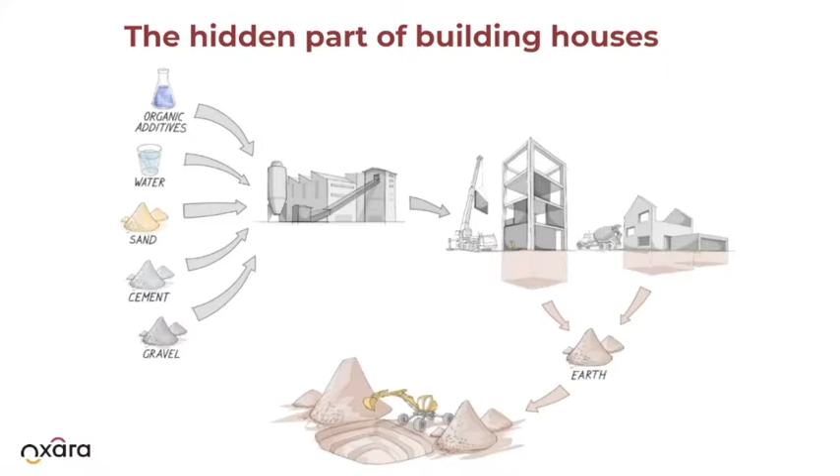What is not so well documented or evaluated is the amount of excavation material that is landfilled in the process. The excavation material is what you take out of the ground while doing the foundation or producing a tunnel, and so on. This amount of material represents, in Europe, around 45% of construction waste, around 400 million tons of excavation material.

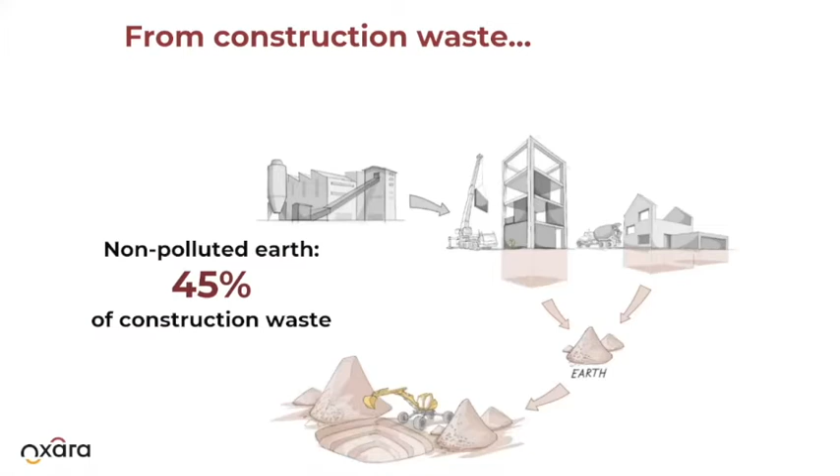No problem. So we're talking here about more than 400 million tons of excavation material landfilled each year, from what we got from documentation, and there are some countries that don't provide such information. So it's an important amount of locally available resources that is currently wasted. The idea of Oxara, which was carried out during my PhD, was how do you use this waste and transform it into a more sustainable building product?

We've developed a mineral admixture that allows processing of excavation material like conventional concrete, using similar concrete infrastructure and processes. That means you're able to mix it in a concrete mixer, it's fluid, and then you're able to cast it, remove the formwork within one or two days, and use it for low-rise construction — two or three-story houses — or for non-structural elements, as you can see here. This creates a closed-loop system.

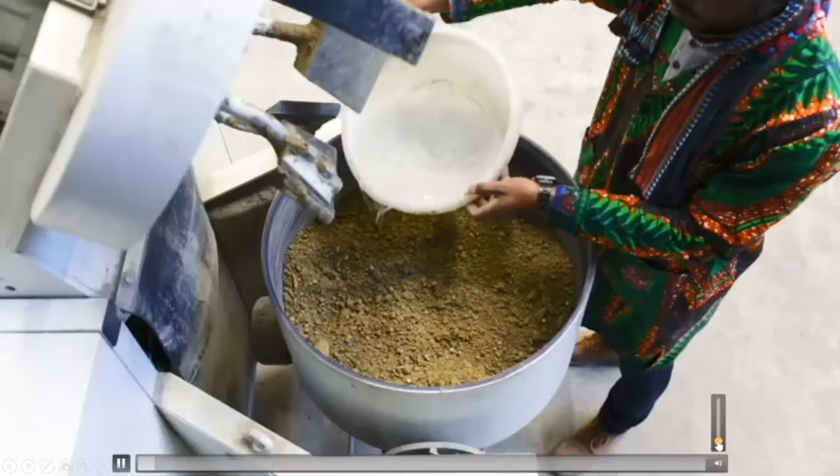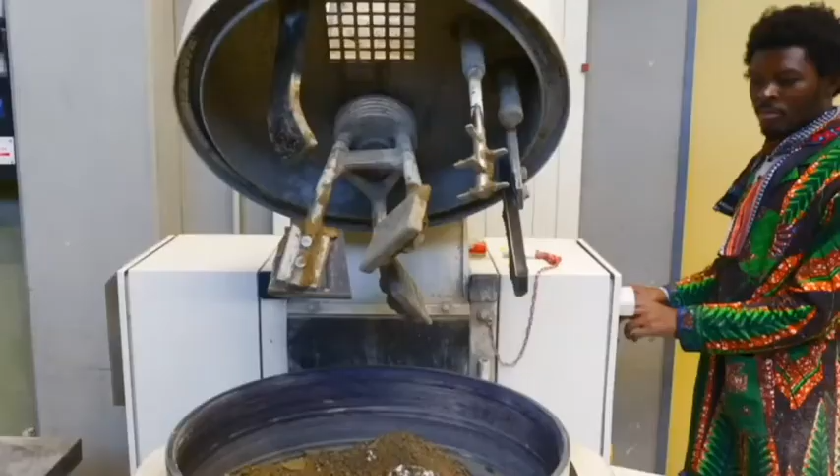So what does that mean concretely? Here's a small video of the process. You have the excavation material, you add water, and then our admixture, within a range of 1 to 2% maximum, and you mix it like conventional concrete. The material is fluid enough to be cast or vibrated.

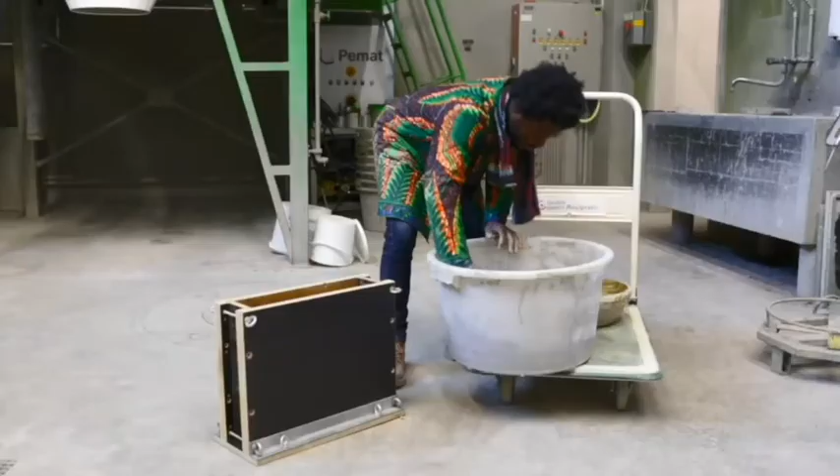The advantage is that because there's no cement — since we're trying to make a cement-free product — you can work with it without wearing gloves, because there's no aggressivity or alkalinity in the material. And in this case, 24 hours later, we're able to demold the formwork.

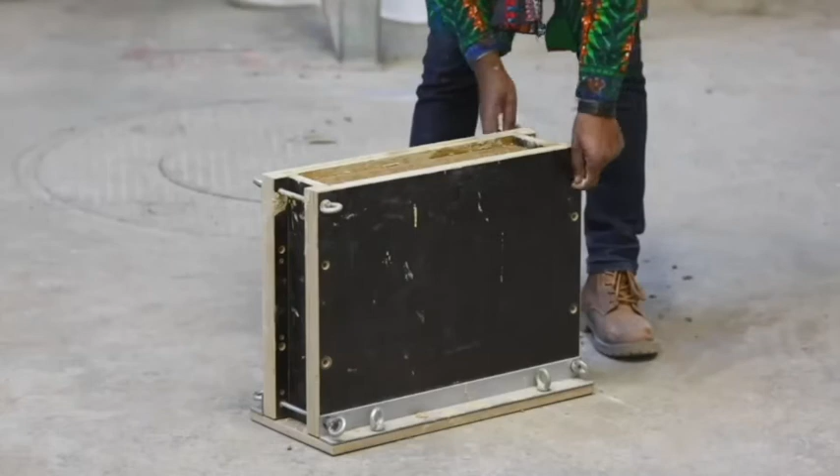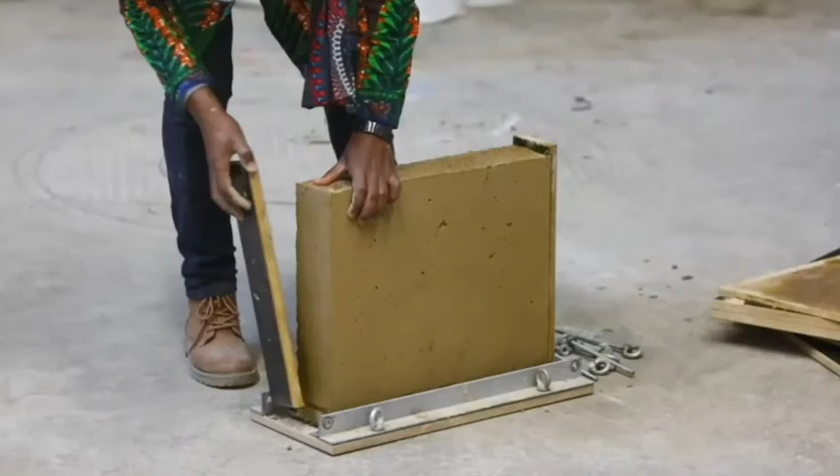So this process was done at the end of my PhD to validate whether or not our admixture technology, which I did my PhD on, worked, and if it worked with a different sort of excavation material that one could take in the area of Zurich.

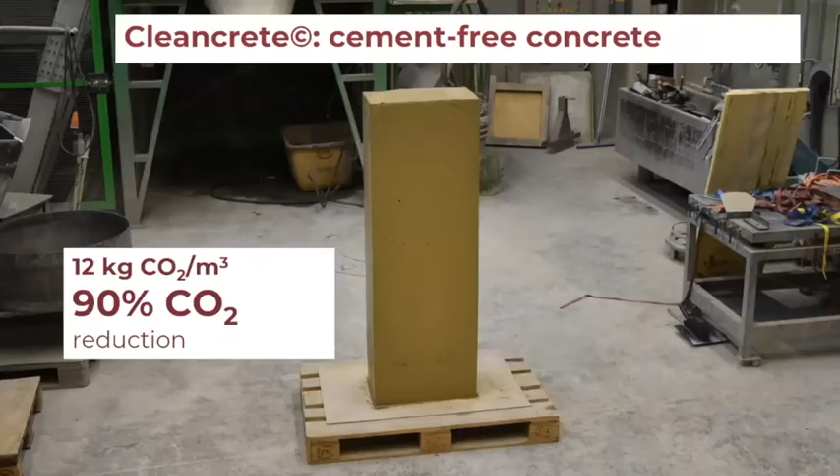So later on, the goal was to test on a little bit bigger scale how this product will work and to estimate the CO2 impact. And this was done in 2019, our first scale demonstration. So it was 1.5 meter height, 30 centimeter, and was cast and demolded after 1 day.

And we did some LCA analysis, and then we realized that the embodied CO2 is around 12 kilograms of CO2. While if you take normal concrete, we are talking here about around 300 kilograms of CO2 per cubic meter. Therefore, we estimate a CO2 reduction of 90%.

Keep in mind that our material is not, in terms of performance, comparable to concrete, as we are talking here about a material with a similar performance as a rammed earth product.

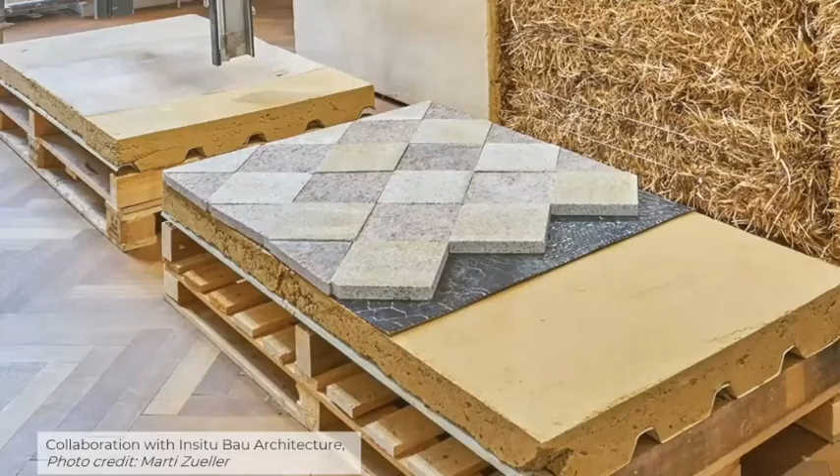And we went on to do also some different demonstrations. This one was done also toward the end of my PhD with Insitu Bau Architecture. And the goal was to use it as a screed and see how the material would perform, and if it could be used for such application or not. And now we are interested to further develop it and try to see how to implement it in the market.

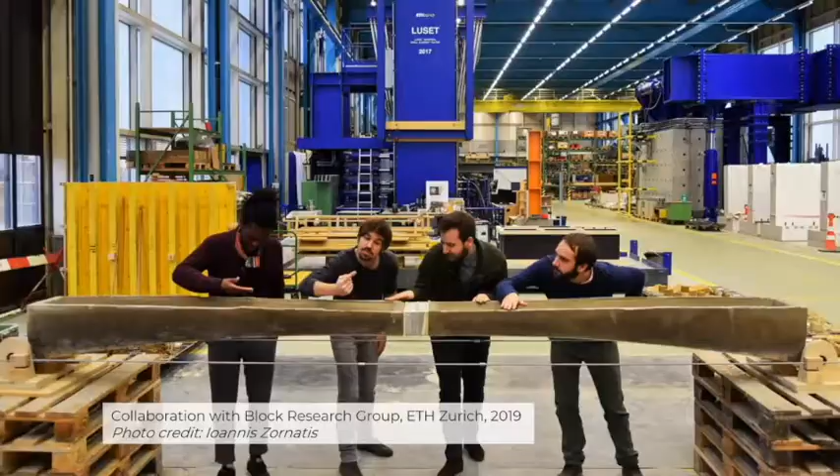Another project that we did also was with Philippe Block Research Group at ETH. And the goal here is to combine low performance concrete with a high-tech design, taking into account the material property, but focusing on the design of the arch, here kind of an arch structure for a floor application.

And on this floor slab, where a group of 2 persons can carry each part, we kind of post-tension it with this cable, and we are trying to evaluate how much load the floor can take. And we are able to put around 250 kilos on this unique part of the floor. And our goal is to produce more, to put them together to create a full floor system.

And it's currently being developed now with the PhD student and the postdoc. So hopefully in 2021, next month, we will be casting it. So we hope that we could have a positive result.

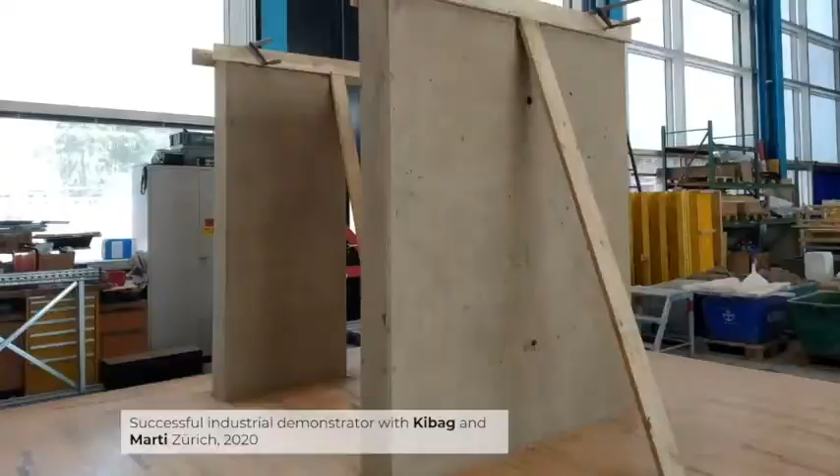Another successful demonstration we did was a wall application, a 3-meter tall wall, 25 centimeter thick element. And in this case it was done with, in Zurich people might know, Kibag, a recycling company, and Marti, a construction company. So we used their waste material, and we mixed at their place and transported the product to ETH, where we are based, and cast it in a normal formwork.

And 2 days later, the formwork was removed, basically, which shows that the process is more or less similar to concrete. And one advantage is that we are able to reduce the thickness compared to a rammed earth wall, as here we are working at 25 centimeter thick.

The issue that we had here was the slow drying process of the wall, because we had quite huge fluidity. We didn't need to vibrate the mix actually. Therefore, it took quite a long time to dry.

So to further develop this technology, we started already end of last year, we produce different elements that will combine together to create kind of a pavilion, and see how we can bring them together by developing a joint system.

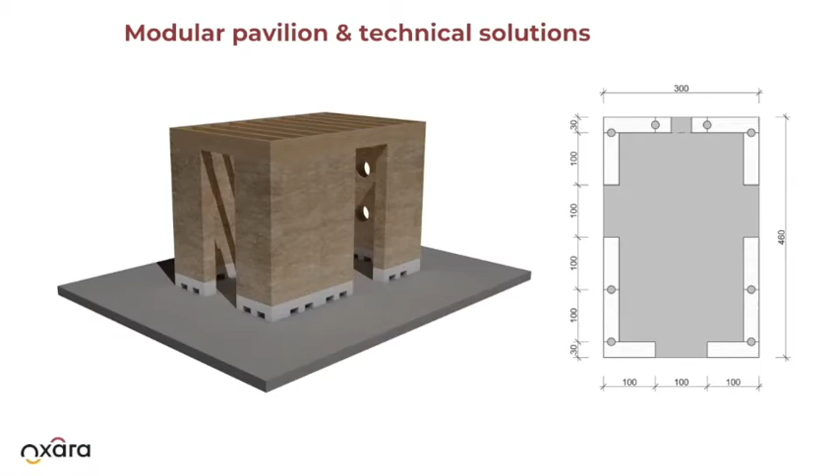As I was mentioning, with the cast wall that we did, we saw that we had some drying issues. Therefore, we were considering how to reinforce the structure with steel or wood, for instance. And we started a project with the Gramazio Kohler Research Group and 2 master students who are part of the MAS DFAB program in 2020, in this case, Jumana and Indra.

And they proposed to move forward with a Cleancrete mesh mold, where the mesh is a bamboo structure of 2D slices that are afterwards joined together with rattan wood pieces, and the earth material is cast in between. The earth should flow enough so that it covers it, but shouldn't flow too much, so that it barely covers the mesh, and then afterwards you can repair the surface, so you create this smooth finish. And here's a video of the process that the students did.

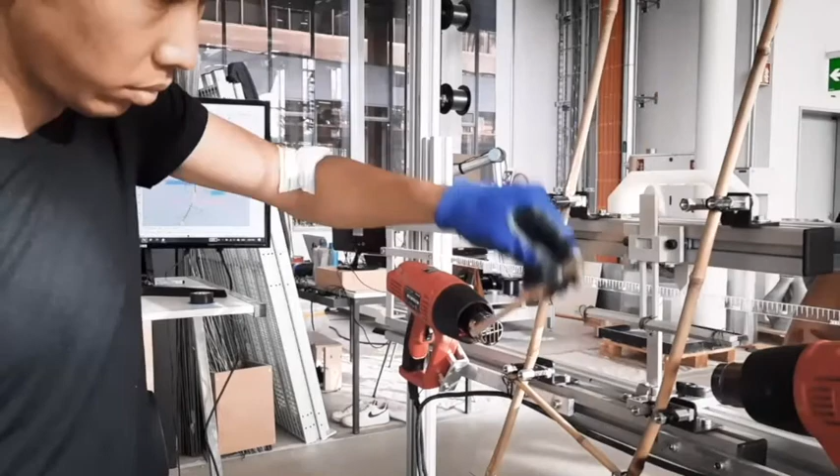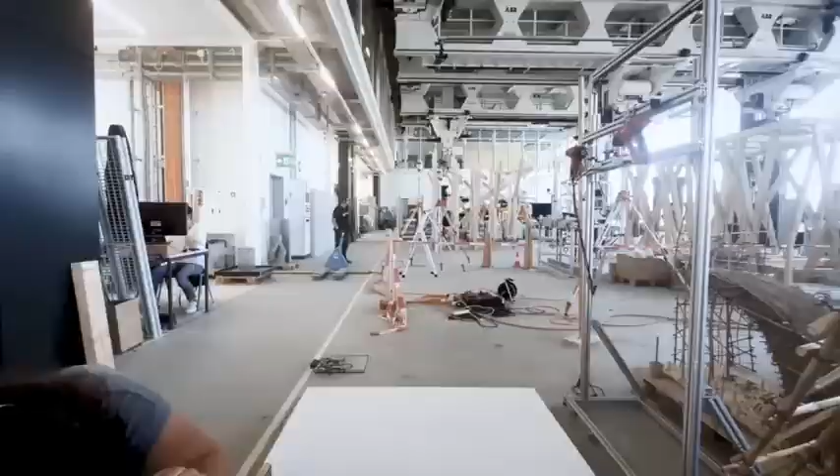So it was a collaboration between Oxara and the Gramazio Kohler Research Group. The really interesting part here was that the robot was kind of a manual process. And because we are using bamboo, they figured out that a heat gun is well suited to create the shape that is needed. And they use a tie gun, of course, to join all the elements together afterward. And there's huge care also about the bamboo pieces stuck between, as they're also used as a leveling for how far your material should flow outside of the mesh.

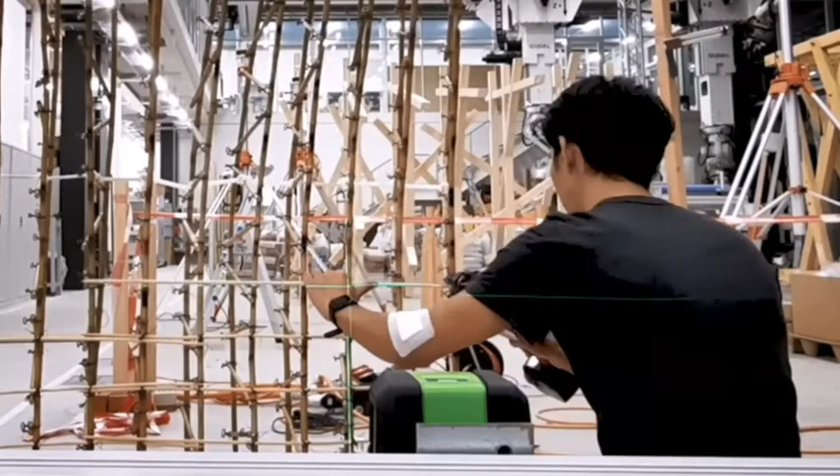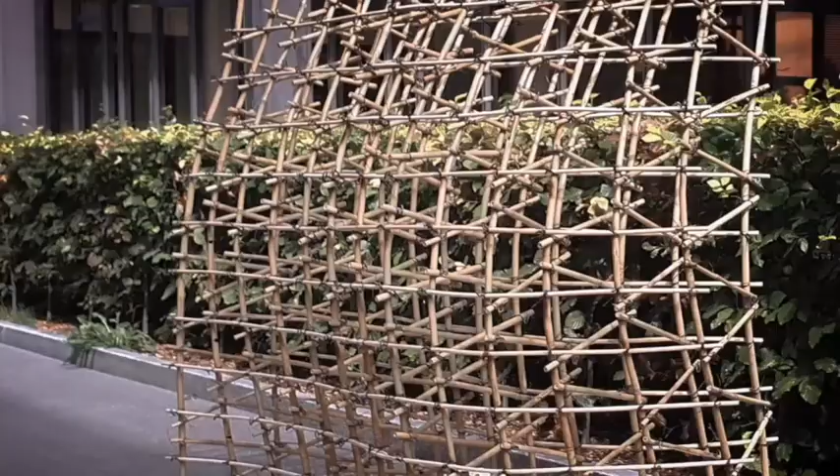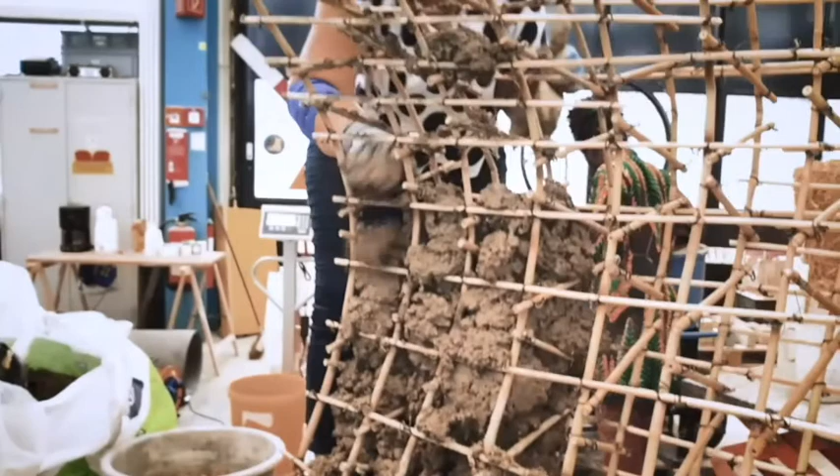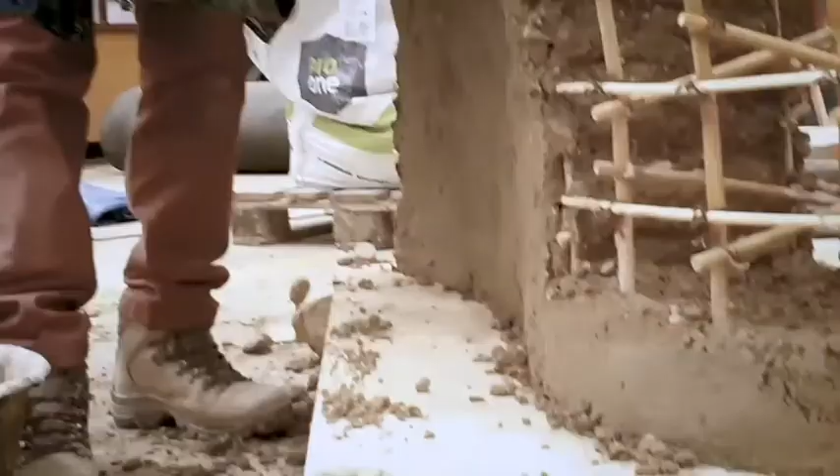So once the bamboo mesh was created, we used, in this case, sludge instead of excavation material. The sludge is obtained after washing sand and gravel, so it has a consistent mix. To it, we add some sand and some fibers. What we observed here is that the formulation was not necessarily perfect, as it was hardening quite fast. However, it was still good enough to fill in the form and afterward to do the finishing. The casting took about 2-3 hours to be done, I would say.

And now the goal is to continue further on the project, as we want to see how to implement it on a real scale. Therefore, we will move to a more straight wall element. Instead of bamboo, the goal will be to try to use wood, for instance, to see how we can cast within a wood frame, and if the adhesion or the cohesion will be the same. The other aspect is how do you connect it in a building element: if you have an existing concrete wall and then a prefabricated element, how would you connect it? Or how would you create your wall element so that it fits your building construction process?

And another question that we often have is how do you create doors and openings, considering that the material is fluid and you might have some shrinkage and some settlement issues. The project will start at the beginning of February, hopefully, and we will investigate that with one of our partners we are currently talking to.

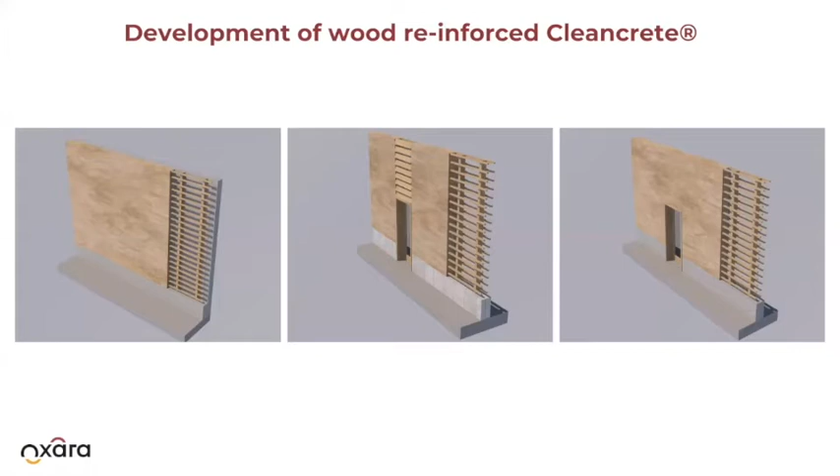Another product of ours is the brick. It's different from conventional bricks, which are like a compressed earth brick. Here it's fluid cast in a normal mold and removed after 1 or 2 days, as for the normal concrete process. And this brick has 10 megapascals, which is quite a good property for a brick without firing it. Our goal now is to find a producer to implement such a brick at an industrial scale. I don't have much to share about it because most of the interest is toward the Cleancrete, so we have developed the Cleancrete quite a lot, whereas for the brick, our goal now is to find the industrial partner.

Now, if we are talking about how sustainable our technology is, I think one needs to understand the material flow in Switzerland. Here is a model that we developed last year with the BAFU. Here's the material stock of buildings in Switzerland. And here you have the input of material, how many million tons of material are used annually: around 60 million tons coming in. And the amount of excavation material that goes out to landfill is around 52 million tons, so a more or less similar amount of material goes in and goes out. The incoming material is gravel, sand, cement, and other materials. And here we differentiate between concrete for structural applications and concrete for non-structural applications.

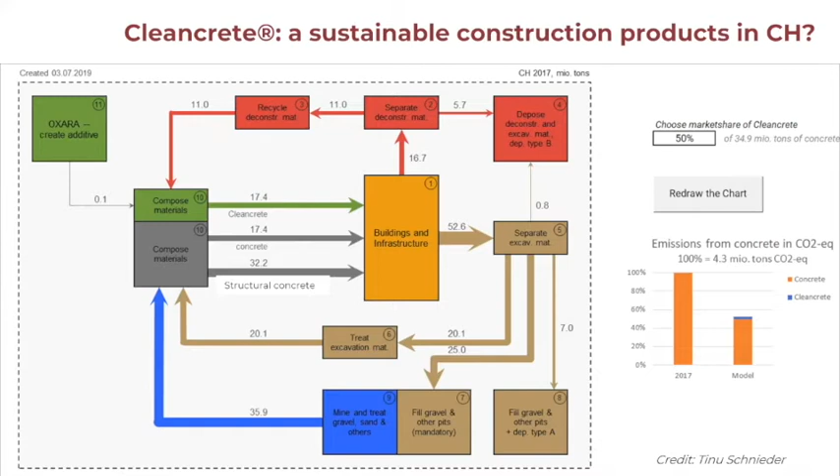And the other important aspect is the CO2 that is emitted here. So we could see that we have not so much CO2 emitted on a global scale. And if you go further and you substitute 50% of concrete with Cleancrete, see what amount of CO2 and resources you are able to save. So this gives you an idea how sustainable our product is and how much natural resources we are able to save, considering the replacement we are able to generate.

And then we did a similar thing on an EU scale, where we estimate that 300 million cubic meters of concrete is produced in Europe, which emit around 90 million tons of CO2 per year. And considering that you have 350 million tons of excavation material per year in Europe, 5% conversion of the excavation material into Cleancrete will reduce around 30 million tons of aggregate or sand extracted per year, which is a huge amount that we are contributing to save. But also 10 million tons of CO2 will be reduced by using Cleancrete.

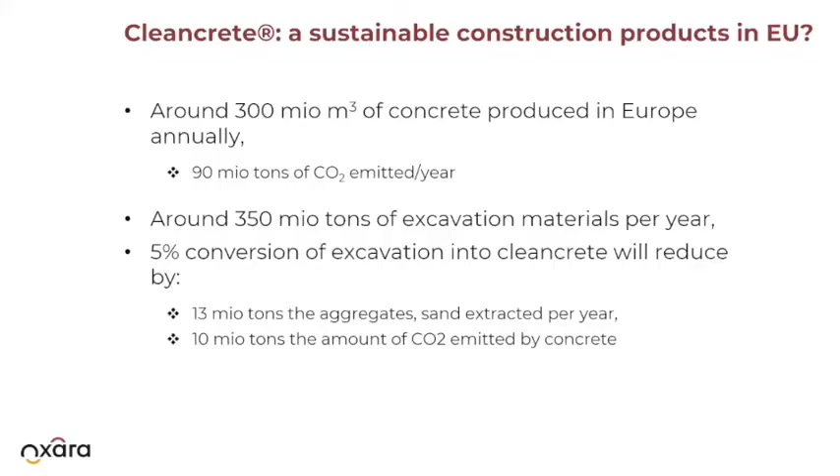And we hope that by 2030 we are able to achieve this goal, as that's what we put as a target for Oxara. And I hope that I managed to convince you that our admixture and the final products, Cleancrete and cleanbrick, could help solve world issues, whether it's sustainable housing or affordable housing.

And I would like to end with who we are, or what we are trying to achieve, basically. What we understood from the construction industry is that you have different players that operate together but are not connected or not always talking to each other. And what we are trying to do is to bring them to a level where they are able to speak to each other. Meaning that as we are trying to implement new technologies, we need the approval of not only the owner to use it, but we need to have the consent of the architect who understands the material properties and behavior so that the design is done accordingly.

We need to work with the construction company who knows how to use the material on the construction site, but also the recycling company so that he understands how to mix our product or how to produce it. So we cannot just be talking to a concrete manufacturer or brick manufacturer and forget the other stakeholders, but we need to put them all together so that we redefine the construction industry, and then we build a strong, sustainable ecosystem with the different stakeholders in order to achieve sustainable, affordable housing for all.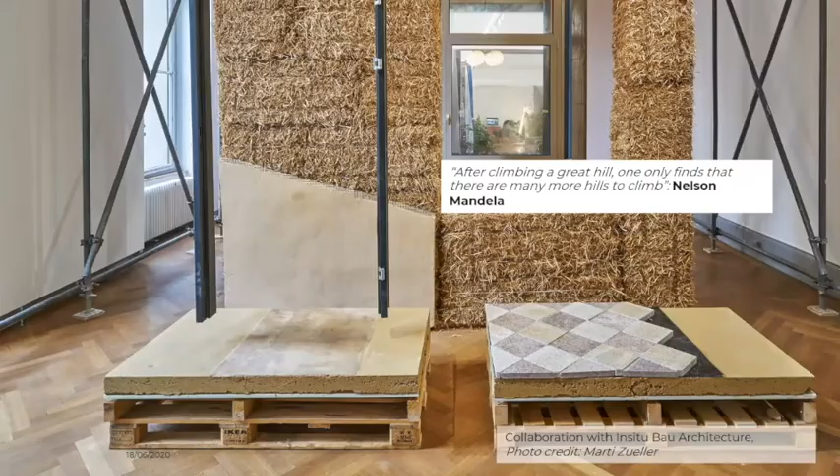So I like this quote from Nelson Mandela, because after my PhD, I thought that I had achieved what I could achieve, but I realized that no, after climbing a great hill, one only finds that there are many more hills to climb. And our next hurdle we need to climb is to start implementing the project on an industrial scale, which we are now discussing with the structural engineering office, construction company and recycling company. Unfortunately, I couldn't share more specifically about those projects because of confidentiality; I didn't have the approval to do that. But on that note, I have finished and I'm waiting for your questions.

Gnanli, thank you so much. It was really interesting. I'm really excited. I think there's great things ahead for Oxara.

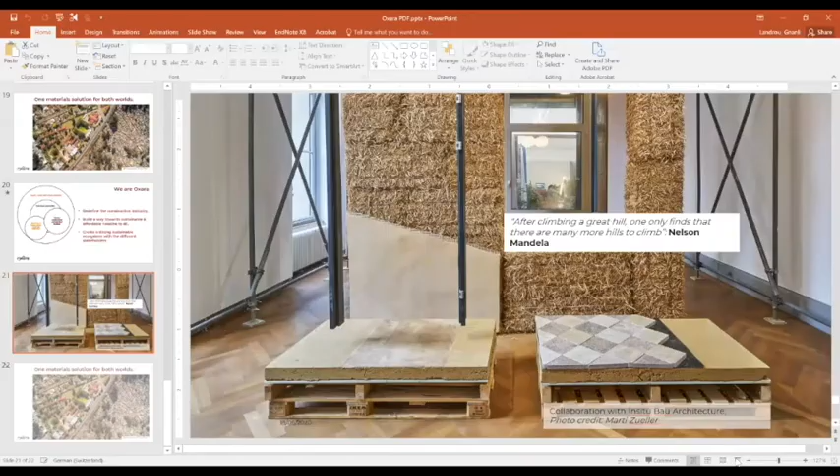Could you just elaborate a little bit more about the last picture? Maybe can you turn the last picture on again? Would that be possible? Yes, this one. Yes, exactly. Can you just maybe elaborate a little bit about what we're looking at? I assume parts of it or everything is from Oxara, but can you tell us?

I guess most people here are architects. I'd like to know, what am I looking at? Is this an Unterboden? Are these floor tiles for a bathroom? Is this all from Oxara? Can you tell a bit what these are?

So I think the attention here is more on the floor element. The screed, I think it's screed in English, that you could use as a material for filling the floor, and then afterward you come with your final layer, either stone plates or wood plates for the finish. The goal here was to evaluate where the performance of the material is not so much required, but the mass is needed for either acoustic or thermal behavior.

It was also a project with Insitu Bau Architecture, and the straw bale frame was again for their project on how to use mostly waste material for construction, but the part done by Oxara is mostly the floor element here. Okay. Have you built this somewhere already, or is this still a test? It's still a test, and we are now discussing a project in Basel for implementing it.